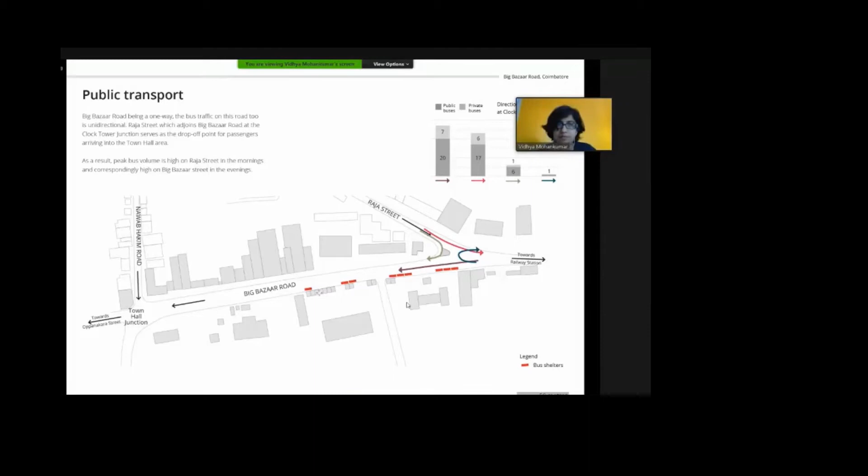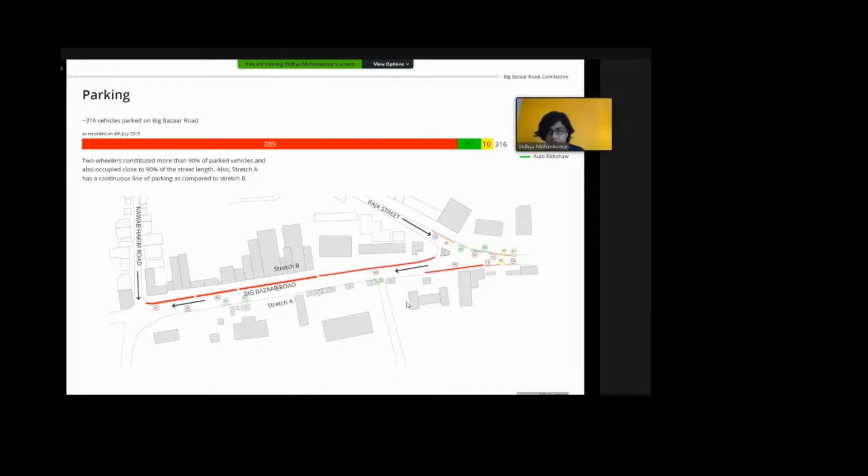The next thing we looked at was parking. There's on-street parking on the other side. On this side, because there was a series of bus stops, there was no parking, but the opposite side was entirely dedicated to street parking. So that was something we had to account for when redesigning - we needed to make sure we weren't compromising on the people parking here, since it's a very busy street and neighborhood with a lot of floating traffic, people coming in and going out who want to park. Because this was a tactical urbanism intervention, we couldn't really move them somewhere else, so we needed to keep them here as well.

We also looked at emergency and service vehicles, because these need to service the retail units over there, and there was no timing restriction - they were coming in and going out at all times. And then we also looked at the street detail, like what's going on there, what are the utilities, because utilities can be obstructions when we are moving, since normally they're not placed in a streamlined manner.

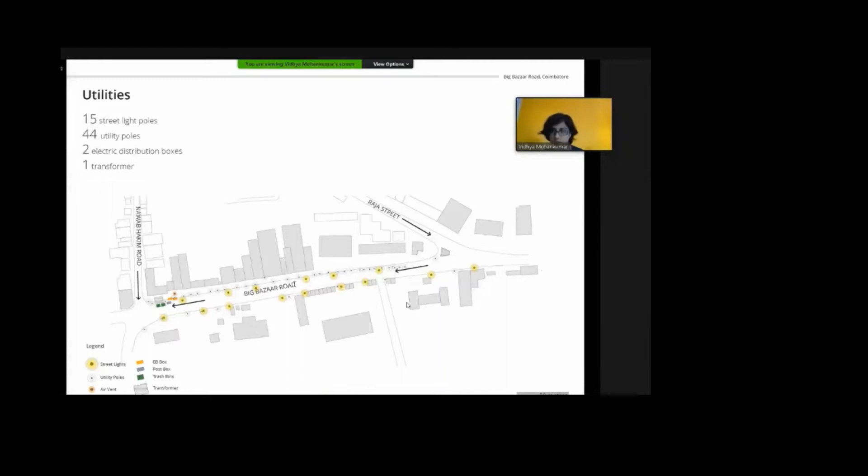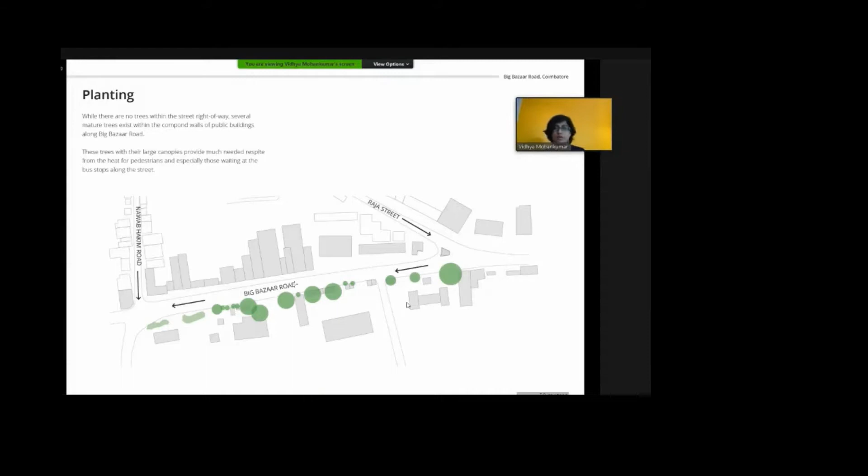You could be walking, and how many times have we encountered an electric pole or a street light or an electric box or a telephone box and so on. So those were important, we had marked those. Planting, as I mentioned, they were all within the compound walls of the institutional building. Nothing was on the opposite side. On this 300-meter stretch, there were multiple materials as we were trying to see if there was a material palette that was going for the street, but that wasn't the case.

Then we came to the people, the stakeholders. We did an age and gender mapping at several intersections to see what is the composition of people. Because of the schools in the neighborhood, there were peaks, a lot of kids at a particular time in the morning and in the evening. Throughout the day, we saw a lot of old people because they were coming to the government offices for various reasons like pension, banking, whatever. There was a temple which brought in a lot of families who kept coming to visit. So tied to the land use, because of the mixed land use, we saw a steady stream of all genders and all age groups coming at different times during the day.

There was very little activity happening on the street per se, even though there was a lot of volume of people. Most of them were just waiting for bus stops, sleeping, or just spending time, very limited in terms of activities. There was very little reason for someone to linger on the street, and that's the reading we came to. We also mapped the vendors. There was a series that would all sit along the bus stop edge because that's where people are waiting. Vendors normally go where people are, so they were waiting there, mainly trying to call out to the people waiting at the bus stops.

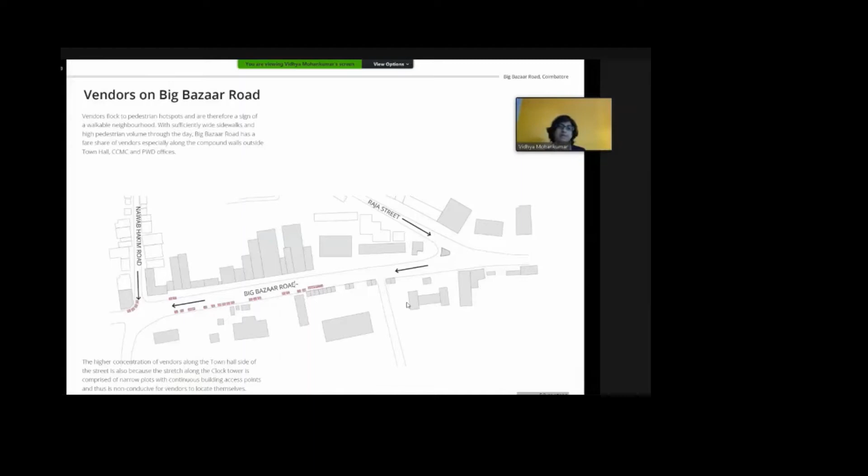So we came up with primary, secondary, and tertiary user groups. We had the working population, the people coming to the government offices, the shopkeepers who open shop in the morning and shut at night, the vendors who do the same thing, and there were a lot of homeless people on the street. These were primarily people who occupied the street for a long period of time. The secondary user groups were like the floating population, the people visiting offices and coming in to shop. The tertiary user groups were people coming in spurts, like students, visitors to the cinema, and visitors to the temple.

We also did this mapping of when they occupy the site. The primary user group is sort of continuously there, the secondary in bits and pieces, and the tertiary in spurts. And so we wrapped it all up with a SWOT - what can we do, and what do we want to do on the street.

Our tactical urbanism, as you all probably know, the whole idea behind it is short-term action which leads to long-term change. It's a great tool that allows you to test an idea, allows you to seek feedback. It's a great participatory tool because, before you go ahead and spend taxpayer money putting some permanent infrastructure on the ground, which nobody knows anything about or wants, this allows you to put it out there, test it, see if they like it, and then go ahead and make it permanent. It also allows you to be flexible with the design, to make changes based on the post-evaluation, which we did.

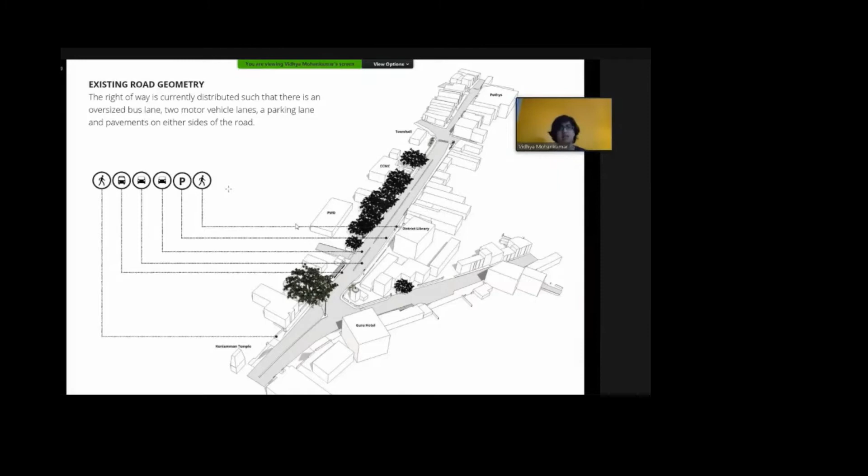And this is what we changed. We didn't actually remove anybody, because these guys have to be here. What we did was just redistribute the right of way in a way that was equitable for all of them. We felt that vehicle traffic was getting a lot of road space, and we saw the picture of people standing at bus stops spilling over onto the carriageway. So all we did was redistribute it equitably based on the data we had.

Now, this is why we do all of this mapping. It's not just a traditional practice of doing stuff in college - it's about how you actually make use of it, how you put it to use and draw value out of it when doing a project on the ground. We had an influence from each of those mappings we did. And if a mapping wasn't really giving us any results, there was no need to even put it up there, no need to make that drawing at all.

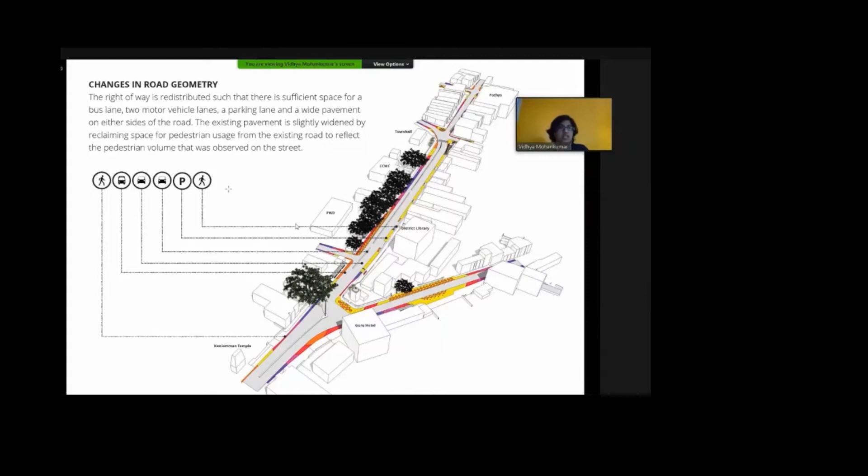So we basically redistributed the road geometry for all the users. We retained the parking, as I mentioned - I think 90% of it, if I remember correctly. That was because it was really short-term parking, with people coming in, visiting the shops and leaving, plus the service vehicles I showed you a picture of. So it didn't really affect things, and that was something we wanted to test during the experiment. We weren't wrong in that assumption - if you remove 10% of the parking from the street, nobody was going to be affected that much.

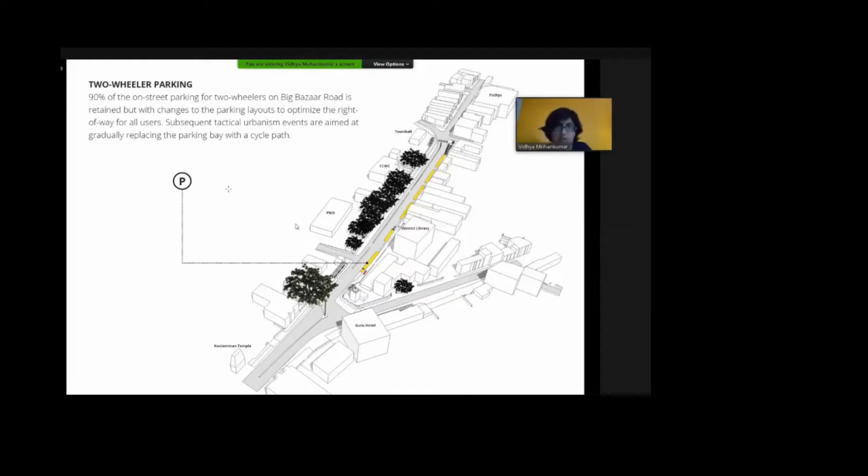The next thing we did was pedestrian crossings. There were no pedestrian crossings on the street, despite so many pedestrians. Everyone was crossing everywhere - it was very haphazard. I keep mentioning the children going to school and the senior citizens coming to the offices over here, and they had no place to cross safely. So we identified places where we felt we could do with a pedestrian crossing. And in order to make people use them - we do have a tendency to cross everywhere, that's just how we're programmed, I guess.

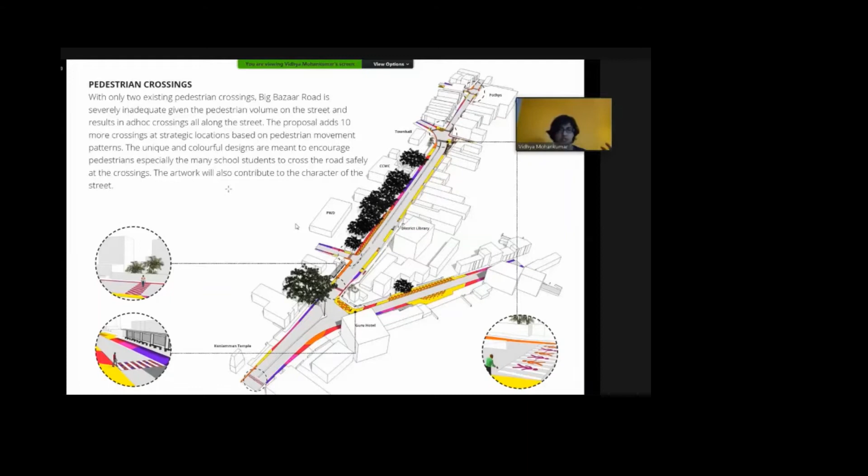Just to get people to use the crossings, we came up with very colorful, unique designs for the pedestrian crossings, so you're visually drawn to them and want to cross there. That was the strategy. So these were some of the designs we made - some were 3D patterns, and some were just fun patterns we wanted. We really just wanted to make it colorful. Here's an example of a pedestrian crossing - this is the implementation I'm talking about.

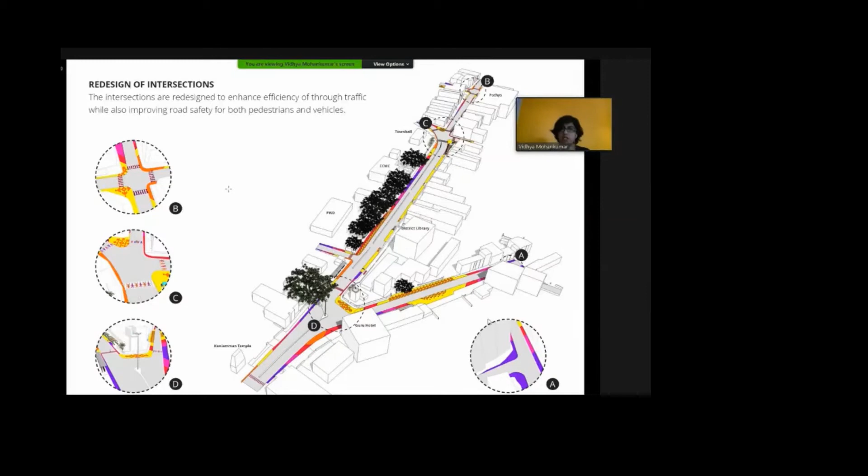And then we looked at the intersections. The intersections were a bit of a nut job kind of situation - everyone turning everywhere, everyone crossing everywhere, everything very haphazard. So we took these key intersections and reworked all the radii, and came up with patterns again to visually direct someone driving a vehicle to turn outside of that radius and not come very close to the curb line, which we had reclaimed for pedestrians. So this, for instance, is the clock tower intersection - this is what we came up with, and this is what it looked like when we finished it.

This is the town hall intersection, and this is what we came up with, and this is what it looked like.

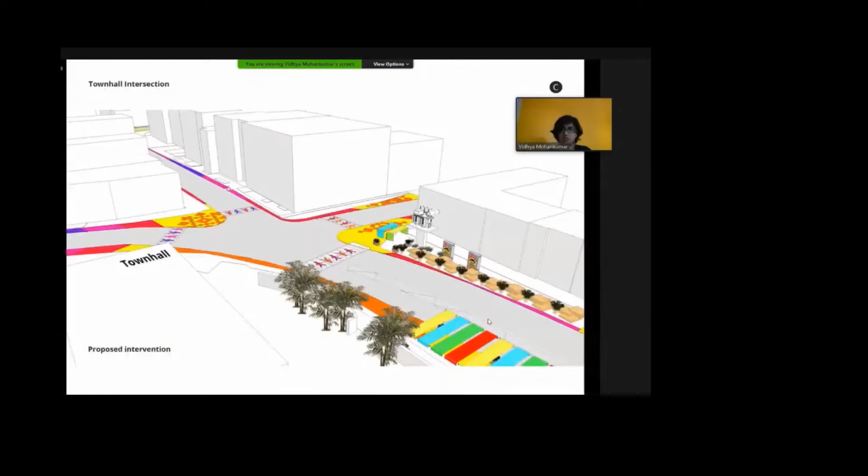Just a few views of the street itself. You can see the shading device here, which was something I kept reiterating about, how there was no shade for people to walk along the stretch. We wanted to give them that opportunity, not just reclaim the sidewalk and give them more space to walk, but also make it comfortable.

We also had these seatings made out of tires. Again, I keep mentioning kids, old people, a lot of people waiting at the bus stop, nobody has anywhere to sit or wait in the shade. All of this came from the observations we made on site, finding really quick and easy ways to make it possible for them to experience a different kind of street.

On the right here as well, we had seating made out of pallets. These were small retail units, and a lot of people were lingering around here all the time. So we thought, why not give them a little bit of seating to come out and spill out? Maybe some vendors could also set up stalls here. We were thinking in multiple ways when we put up this kind of seating.

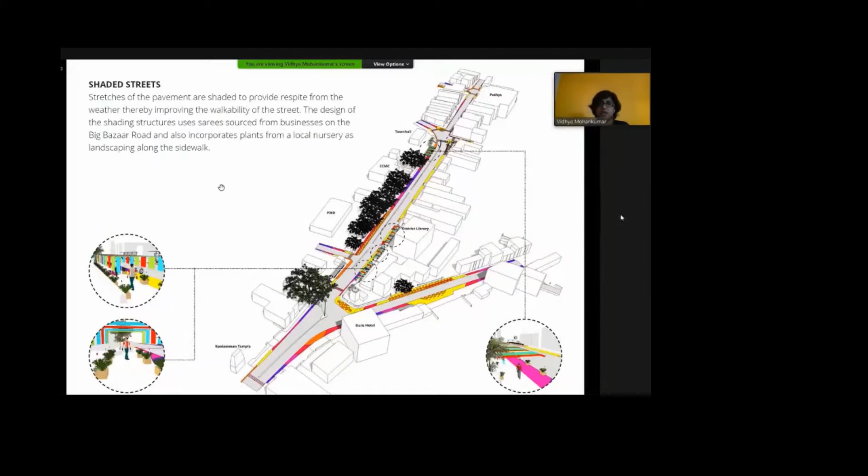The shaded streets I was talking about, this is what it looks like, what we proposed and what we managed to put up. This was a very simple structure, just some GI pipes, and we put these up, almost like saris. These are actually saris that we bought from a shop on the street, and we just put them up there. Like I said, they were drying, but you can see people look a little bit more comfortable walking there.

The plants, of course, adding some color. Who can say no to plants? These are some images of what it looks like.

Remember I mentioned there were very few activities on the street, people weren't doing anything except waiting for transport. So we wanted other activities to encourage people to linger on the street. If you linger, it improves your livability. It's only if you're able to linger that it means it's livable. That's kind of what we were going with.

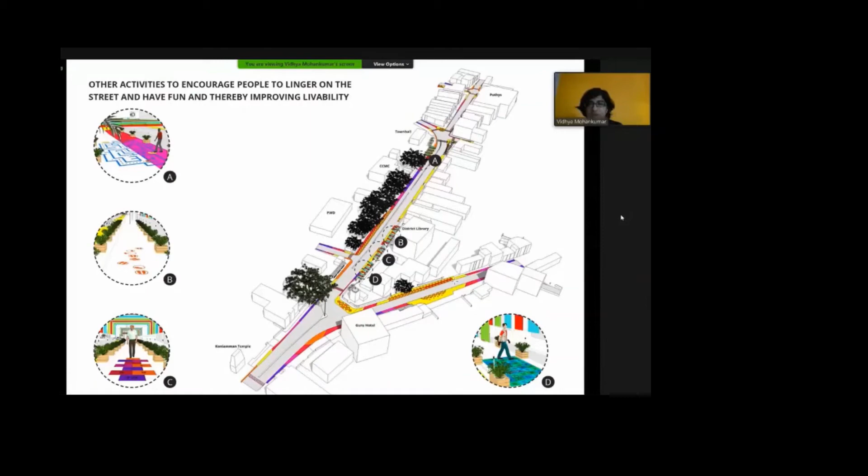Again, drawing on the fact that so many kids were coming here, we came up with these little games. Adults can play games too, so we came up with these games and put them up on the sidewalk that was reclaimed.

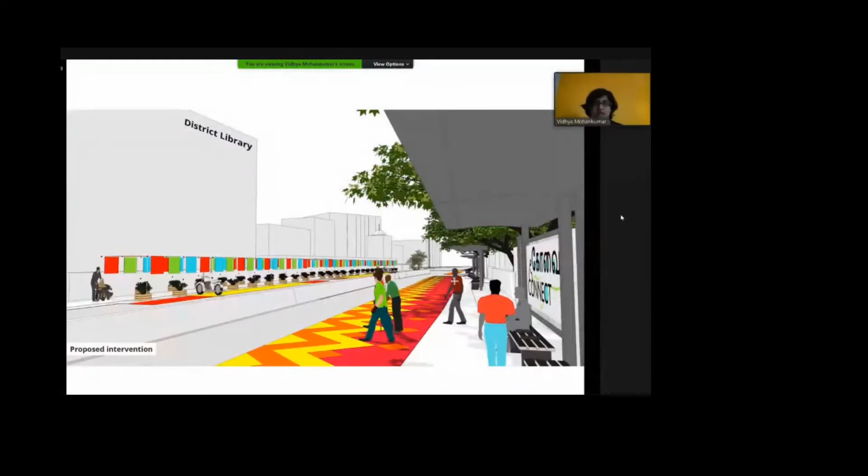A few more views, and this is the bus stop. As you can see, a lot more people, and there's enough space for them to stand now and sit.

By the pattern you can see, it's vibrant, and contrary to what we were fearing, the buses actually stopped on the other side. I think there was a lot of behavioral science we were playing with here, really psyching people into thinking and behaving in a way, demonstrating that it's possible to do this through design. A lot of times it's not easy. I'm not saying you can solve all the behavioral issues through design, but we have to try, and I think that's what we were trying. We really tried here. Can we do it?

For us, it was anyway a test case. We were really testing out so many things here. Will this work? Will it not work? Will people like it? Will they reject it? Will they actually follow what we want them to follow? Will they behave in a manner we are encouraging them to, or will they just do whatever the hell they want to do?

These are pictures that I think were testimony to the success of it. These women, we spoke to them as well, and they were like, we're all friends, we come here every day, and we've never had an opportunity to sit down and chat like this while waiting for the bus. You can see how comfortable they are doing this, and I think it's a very heartwarming picture to see.

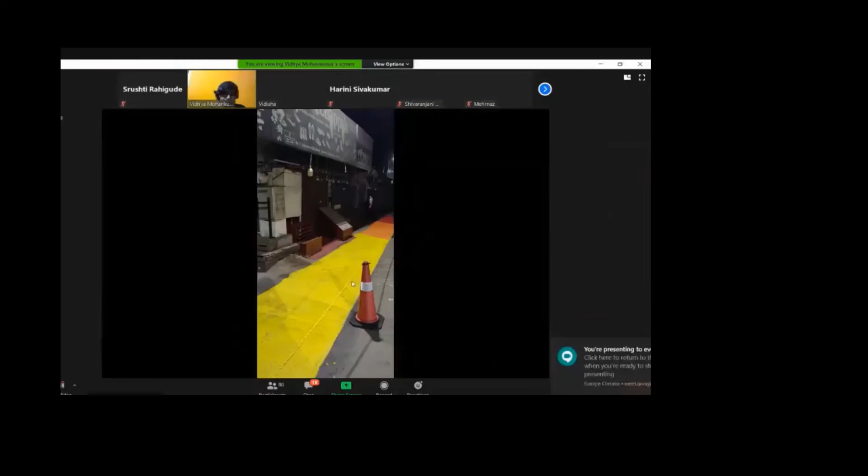The next question is about whether there were other interventions you thought about or wanted to implement with your team, but for some reason didn't happen. Could you talk about some of those?

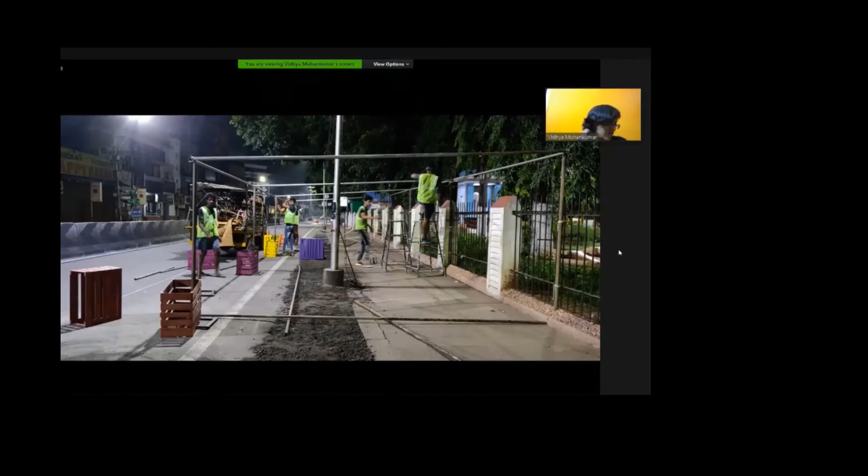I don't think we didn't do anything, but maybe we scaled down a few things. For instance, we wanted more games, and we didn't do as many as we wanted. Also, as I said, we had to cut down on the number of seating.

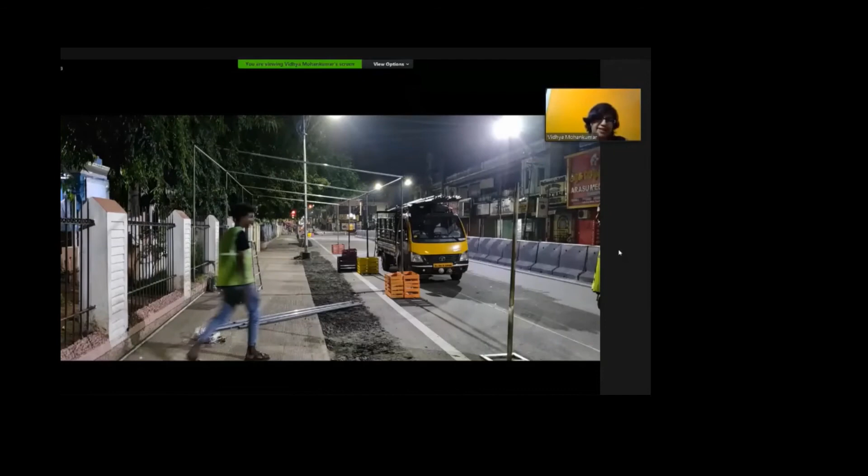As far as our proposal was concerned, we kind of managed to do everything. Even during budget allocation, we were careful to make sure all the different types of interventions we planned for would be there on the street, even if toned down. The project planning for implementation was quite rigorous, with a lot of back and forth, give and take. I don't think there was anything we wanted to do that we didn't.

We were very particular that we didn't want to displace anybody, including the vendors. The provisions for the vendors were all there - this is where you guys sit, if you can sit where you sit. We were hoping more vendors would come and sit under the shading, but that didn't really happen. The vendors kind of kept to where they were originally sitting.

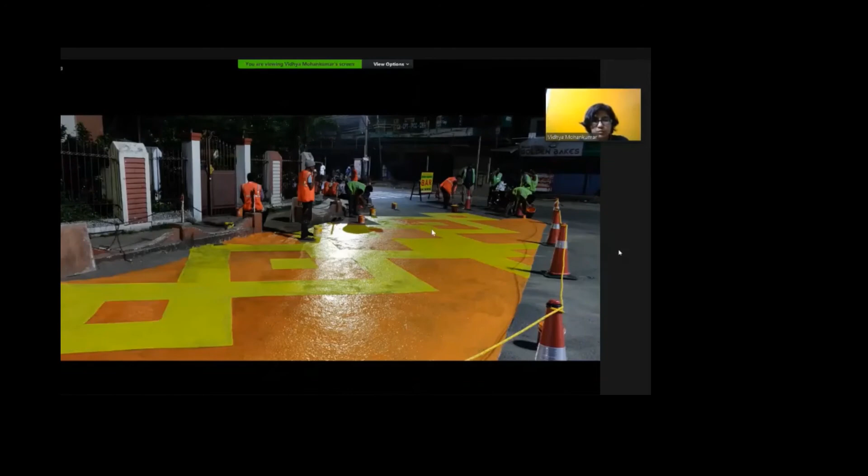There's another question about how you decided on those patterns and colors, the entire language of the crossing, since they're quite different from each other. What was the thought process behind those colors and patterns?

We had a color palette, about 5 colors that we picked. They're not completely different from each other - actually they're a sort of transition. In the drone shots especially, you can see they're part of the same palette. For the patterns, we wanted something geometric.

The ease of transferring the design from the drawing board to the street was a very important consideration. We don't have forever to do this - we're working at night, blocking traffic, so we have to do something fast. Those were all considerations in the design. We had to make stencils or templates to make sure the pattern could easily be replicated across the entire stretch.

We were also conscious of the zones - the intersections had a particular treatment, mostly yellow and orange, and then the other colors start appearing along the length of the street. So there was that transition of colors, if you notice. But I think the primary determining factor was the ability to transfer it very quickly onto the street from the drawing board.